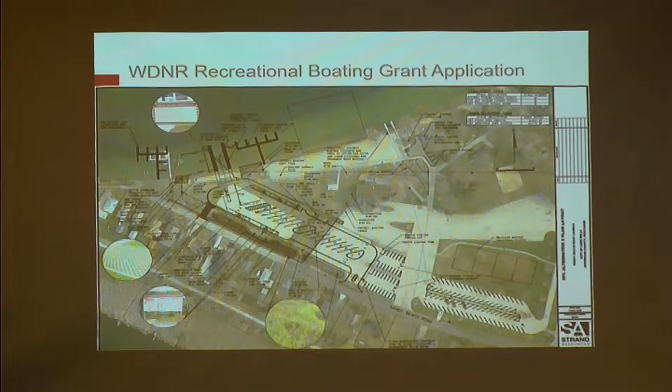But this has been witnessed in a number of different PIMs, so I wasn't going to spend too much time on it. We're going to talk bigger picture about the redevelopment study itself and the layout, and kind of why the council approved the study as it did. So just to orient some people, boy, it really is difficult to see, I don't know how to make it any bigger.

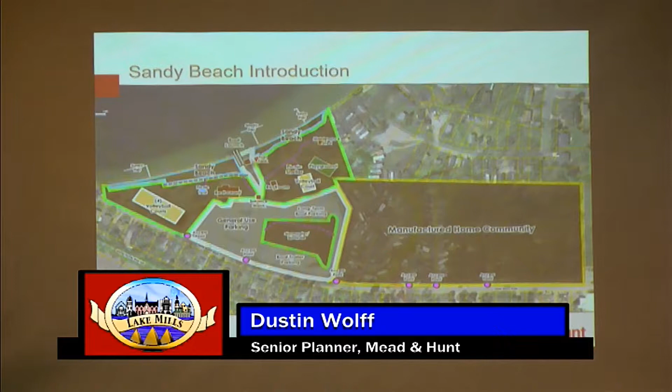On the east end of the study area is the manufactured home community, immediately west of Rotary Park. That transitions to the large area in the center, which is the general parking area with a stormwater management pond.

Well, it doesn't actually function as a stormwater management pond—it's really just a green area. Anybody who's been out there in the rain understands it doesn't really function as a stormwater management pond. That's another reason for doing the study.

In the center is the restaurant, and then the existing boat launch is here with the other facilities. So just a very quick orientation.

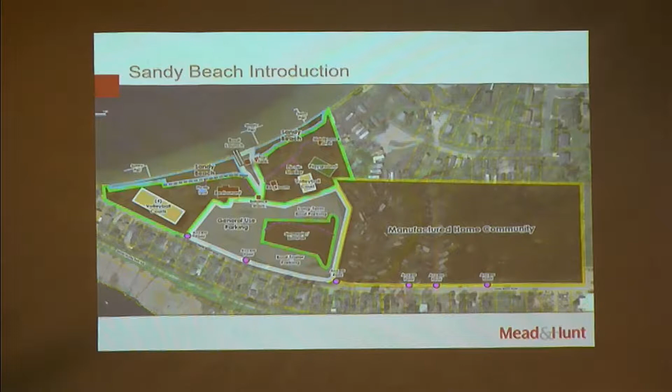The manufactured home community consists of not quite 100—Rob confirmed it's just under 100 operating sites out there, from May through October.

As I said, this started by looking at the mobile home community before we looked at the rest of the park site. The issue we're dealing with out there is all of the infrastructure is failing. We're highlighting some key issues here—there are 3/4-inch water mains serving the mobile home community, which is pretty substandard. There are collapsing sanitary sewers, failing asphalt.

The roadways out there are very narrow. When the city wanted to buy Sandy Beach Park, it had to take over the mobile home community as well, decades and decades ago. It wasn't constructed to any sort of contemporary standard, even for the time. It was seasonal housing.

The roadways are very narrow. They are not constructed to any subsurface standard that we would require, or any width that we would require today. So there isn't a lot of parking out there for the users themselves, so people park up and down the roadways. As I said, it's very narrow, so when there is an emergency issue, we do have problems with that.

There is poor site drainage on site. There's inadequate, really no, stormwater management for that area. And then there is a pump station that's very antiquated that needs to be replaced—a lift station, the sanitary sewer lift station.

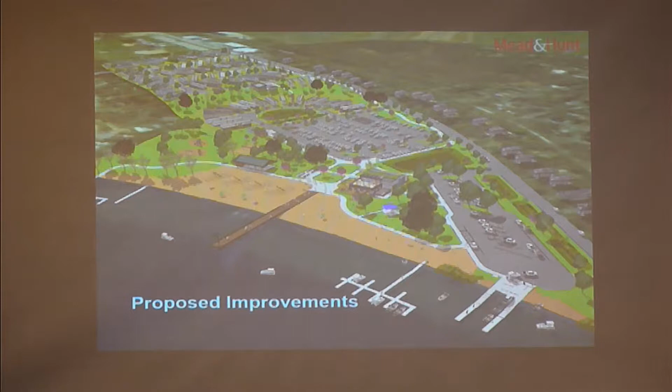At the end of the day, it's time to reinvest. So what we're showing here is a revised concept based on some of the feedback we received from the PIMs with the boat launches, and feedback from the council to remove certain elements, specifically the housing and lodging component. The focus here, and we'll have more detailed graphics, is to have a single unified beach for recreation activities, moving them to an area where they're highly visible when you're inside the park, not scattered throughout the site, to ensure many eyes on each other and to remove conflicts with vehicles.

The restaurant is still illustrated as the center, but we'll get into more of the details there. We have added on to the parking facilities considerably and improved stormwater management. And again, we have a number of graphics to illustrate that.

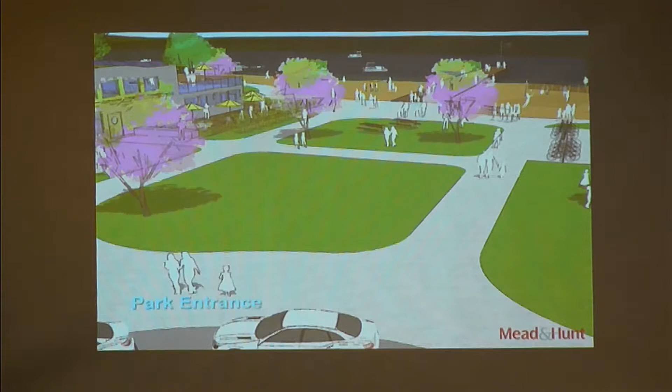In the short run, the launch would stay while the new one's being constructed, and there's discussion of maybe maintaining part of the launch - not for vehicle access, but for someone to carry or portage canoes or kayaks down to the water's edge. But as you can see here, we'd have a large green.

There would be a very large drop-off area at the edge of the parking lot, with no one going into the park with a vehicle. Very clear pedestrian spaces, extensive visibility to the water from the parking lot, and extensive visibility across this green to ensure it feels accessible and convenient for pickup and drop-off of passengers, while removing conflict points between modes where we can.

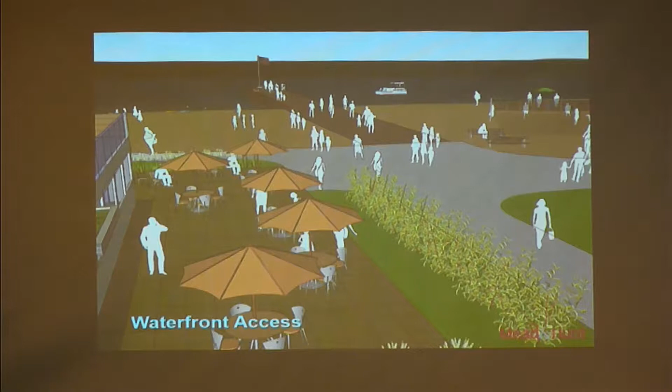It's just a different angle. This is showing a patio area with the associated restaurant, but again this element - there's a pier, we'll talk about that in more detail - is a unifying feature. You can see good visibility throughout the entry area of the park.

Extensive improvements to the parking facilities. The proposed parking facility is in the same location as the existing one. It's reconfigured a little bit to square it up, but it almost doubles the number of parking stalls.

One comment we heard from the Parks Board was to add maybe a few more islands, et cetera, to green up the parking lot a bit, which we don't disagree with. When we were tasked by the council, they wanted to see how many parking stalls can fit in an area that meets design standards and functions properly, and then we can tweak from there.

Part of the proposal is no parking on Sandy Beach Road. So if there's no parking on Sandy Beach Road, you need to make parking available for all those cars in the parking lot. So we go from about 127 parking stalls to what's being illustrated here: 280.

It would reduce from there if you added a few more landscape islands, et cetera, and those landscape islands could include infiltration, bioretention, and so on. We also illustrated, if there was a need outside the manufactured home community, additional on-street parking, whether angled or perpendicular. Whether that's put there at all is a conversation down the road, but it does fit and function properly - that doesn't mean it has to happen. In a nutshell, think of us doubling the amount of parking available off-street at the park site itself.

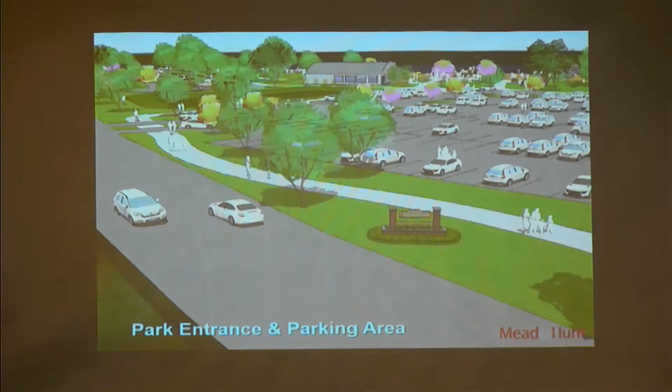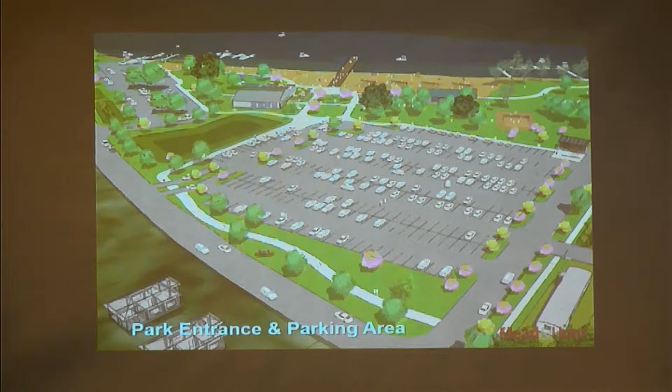Again, improved parking facilities, better pedestrian facilities to get into the site and within the site, to separate pedestrians from vehicles. You can see ample parking, a drop-off area, easy to identify entries and exits, and good, safe circulation within the site. There would be a series of pay kiosks around the park area, convenient whether you're going to or coming from your car. The rate structure hasn't been sorted out, but the plan is that you'll pay when you park your vehicle, with the rest of the facilities at the park free to everyone.

There's an addition of a small maintenance facility for park staff, for mowers, etc., off to the side. That white cube structure in front is the lift station that would have to be replaced. It's located off the edge, easy to access for maintenance, but not in the middle of the site where it currently is.

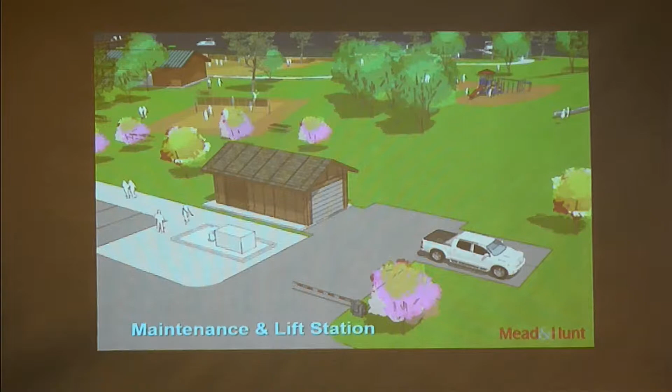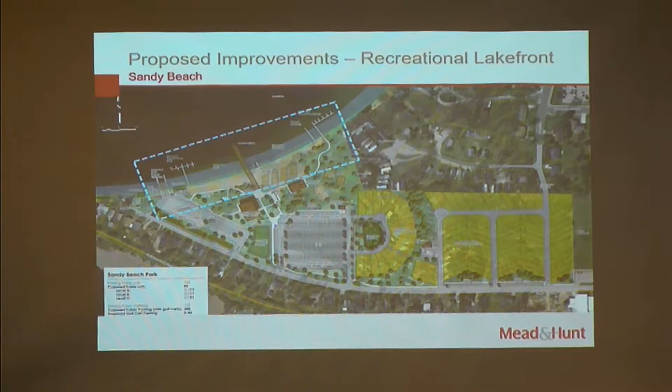The most notable element, and you can see how the discussion stemmed from the boat launch itself, is the new unified lakefront—a singular beachfront from one end to the other without fear of vehicles in the middle of it. There's a pier structure there, a big architectural element extending out into the water so people can enjoy that.

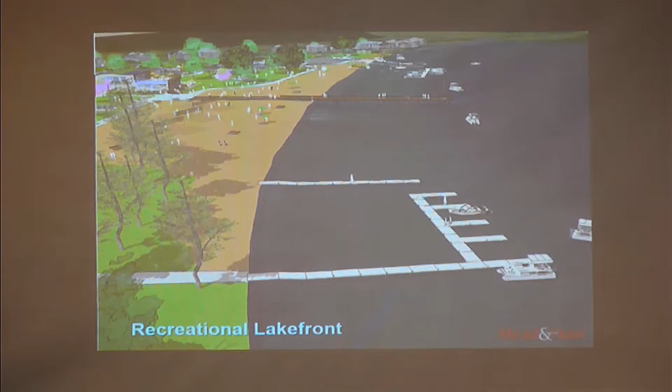The boat slips you see are the existing boat slips. They would be ADA accessible with a path system, so not exactly like they are now. We're trying to make the entire park more accessible to all users. The final configuration and location of the boat slips would be subject to review by park staff and the park board itself.

Some more conversation would likely happen with that. We've gotten some feedback—people want to make sure there's an area to beach your boat if slips are full, and that slips are located so they don't conflict with swimmers. We're not showing all the details, like a defined swimming area, here, but those things would be brought forward again, as you have today. There would be a large identified path system where someone can readily get to the water's edge.

That pier we're showing in the middle references history—Sandy Beach has always had a large element like this; this was a huge water slide. Some attendees at previous presentations remembered going down this slide. I'm amazed just looking at the photos. I'd be remiss to think a parent today would let their child go down this, but it looks amazing and a little fearful simultaneously. It was a huge structure people came from miles around to participate in at the beach.

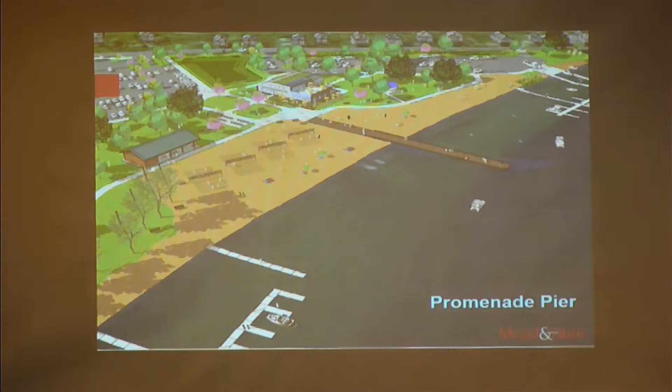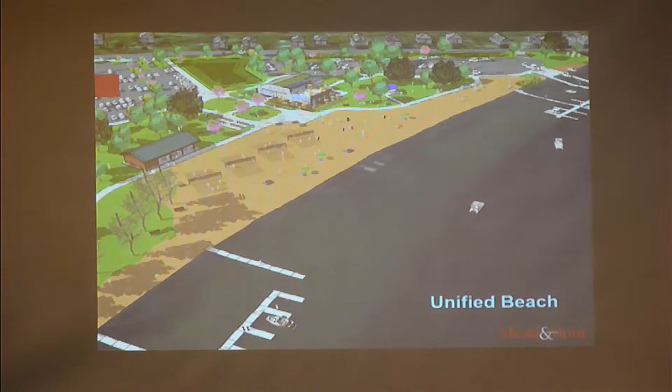That's where the pier you see projecting into the water comes from—having a large element that attracts people out onto and over the water. There's certainly the ability to remove it; it's not a linchpin to this design, but it was an attempt to pay homage to the history of Sandy Beach Park. There's great information in a case near the entry downstairs from the Historical Society about the beach itself—I encourage you to go read it and see some of the photos.

But again, a large unified beachfront separates vehicles, especially boats, from the boating and beach recreational areas. There are also improved volleyball courts and a playground area, moving them from where they are now off on the edge.

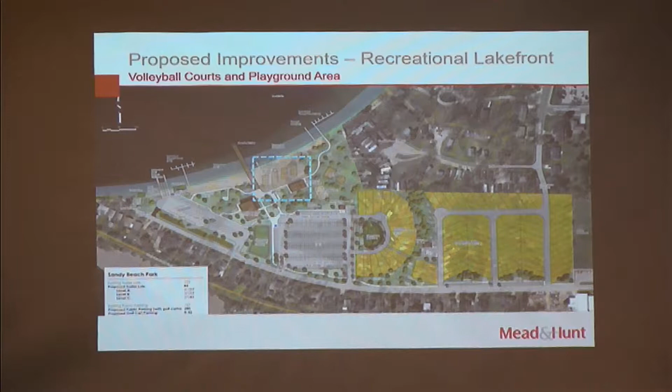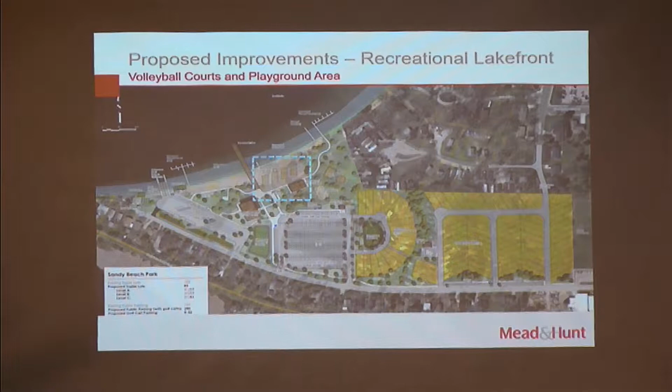They're going to get disrupted by the proposed improvements for the boat launch. There is an interim plan to locate them inside of the existing green area in the parking lot, and the volleyball organizations have been contacted about that, and they're fine with that in the interim.

But putting beach volleyball on the beach, you have, with the redesign, plenty of area out there to accommodate the beach volleyball courts on the beach and still have plenty of beach space for sunbathers and families. It does retain one of the volleyball courts out in the kind of park setting area as well.

They do use them all pretty regularly, so we want to make sure that we are accommodating them moving forward. But again, you can see pulling all the recreational activities together so people aren't off on, if your kids are playing volleyball, they're not off on one side of the park and you're over on the other.

Improved playground. Some of the playground equipment is nearing the end of its life, and so does need to be replaced. Playground equipment, while we're showing examples here, would range for small children to tots to kind of active preteen children.

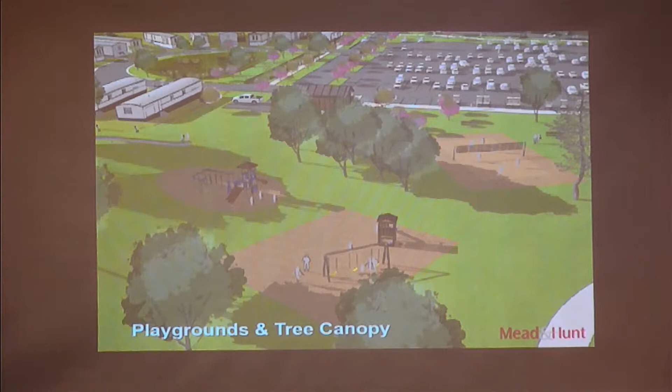The equipment, et cetera, would always be, as you normally do, evaluated by your park staff and determined by the Parks Board as to what's appropriate out there.

New shelter with bathroom facilities out there, so an open-air shelter with connected bathrooms. The bathroom facilities out there are antiquated. They need to be replaced. A new structure out there is necessary as well, so you can still have some shaded, covered parking, picnicking area.

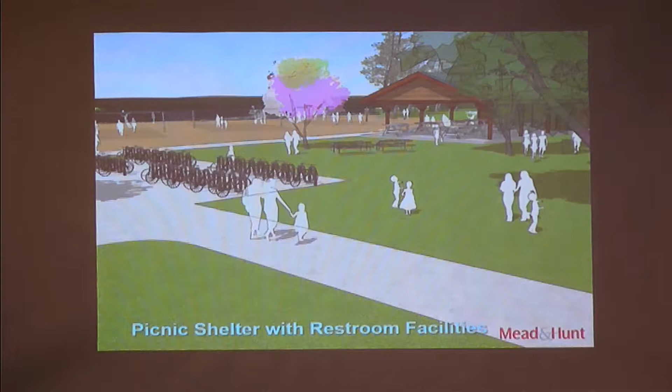Certainly could be made available for rent as you do with some of your other park facilities. You can see there's some lawn area where you can just have some open-air picnicking as well. And the same holds true on the other side of the park, where you have the existing ADA area for picnicking, and again, some other open-air picnicking areas.

The boat launch, this does reflect 2A. This was revised over the last few weeks, month and a half, with the input received at the PIMs and some of the other presentations that were made. This is a 2-launch facility. There is parking for 17 boats and cars and trailers out there, including an ADA one on the end.

On each side accommodates treatment stations, wash stations for aquatic invasive species. So before you put your boat in and when you take the boat out, Patricia Cicero has been involved in determining that.

Stormwater facilities here, linear bioretention facilities, before release, there is a pipe that eventually goes back out into the lake like it is now, but again, treats stormwater before it goes back into the lake, which is not necessarily the case today. We have separated out the entry exit for the boat launch from all of the other parking, so

there will not be confusion between the two. They have their own entry here. What you're seeing here, which looks like a driveway, would really be an emergency access only.

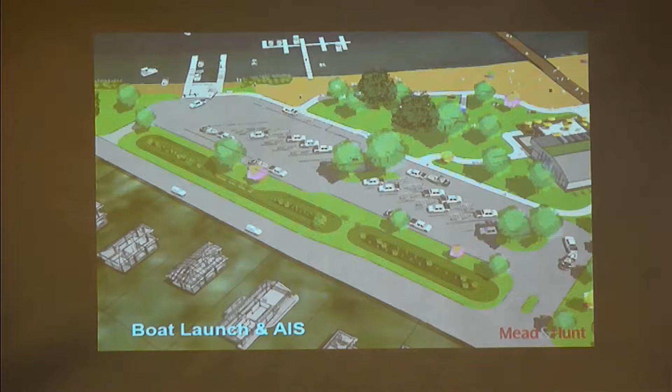Generally think of a hard surface, grass covered, like grasscrete product. So emergency services, et cetera, could utilize it if necessary, but by and large, it would be cordoned off and look like grass because it's got a grass growing through the product itself.

Just another angle of it, we were showing an area where people could beach themselves. We're also showing plantings that were the request of Patricia Cicero at the edges of the water, both to define space and to be functional for treatment on the water's edge.

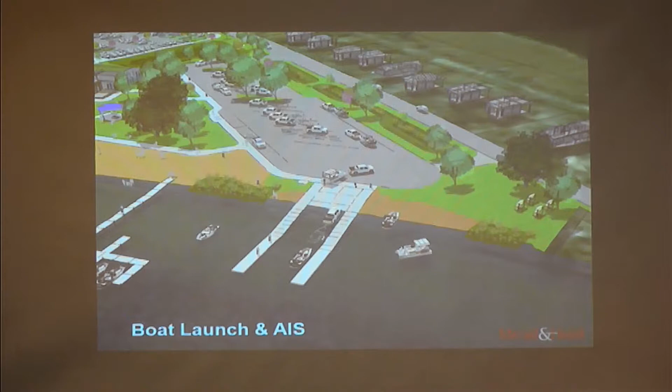As I said, the issue with the piers and locations here, some of that may need to be tweaked as we get into the details. We're not quite there yet on that. A little more feedback may be necessary for the Parks Board to evaluate. So what's appropriate, we did hear some feedback on what's desired, what's not desired.

Again, showing that all of the facilities that are out there now in the water can be retained, in essence.

Showing you, this is the view now through that area with some of the private property, and then to the right is the security fencing, because it's, again, directing you to pay to use the facilities.

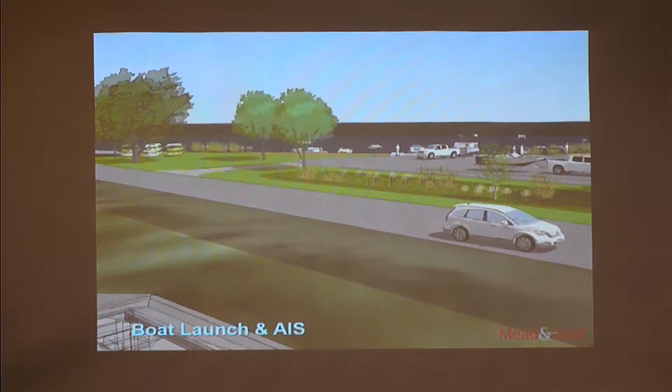This would be a rendering of what they would see. Yes, they'd be looking across the boat launch, but it would be no fencing. It would be native species plantings there. And when a boat's launching, yes, that would be in the way of the view of the water, but over time, it would be different than this.

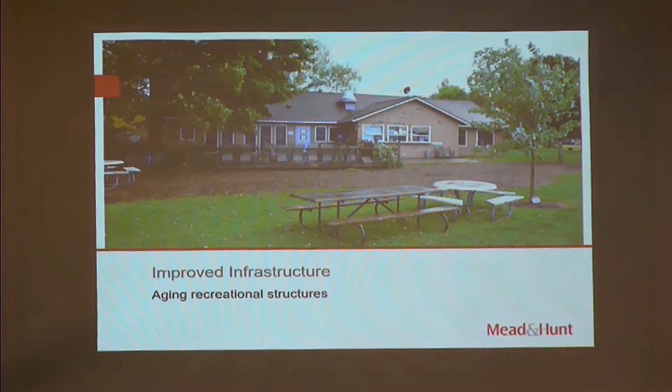Need to improve the restaurant facility, and it's something you certainly need to weigh in on and determine if you're supportive of. The existing facility is at the end of its life. It doesn't function properly, it has failed in certain areas, and was improved by the city to make it functional. Of course, it's well utilized in the summer months. A new facility out there could be used year-round, which would be a nice option, especially if you program things in the winter months like ice fishing. You certainly get a lot of pond hockey on the green area and parking lot, so a warming shelter and restroom facility would be nice to have out there.

I don't want people to get bogged down on the architecture that we're showing here. This is just one version. It shows a restaurant with event space facility and an open-air raised deck. This is a 2 to 2.5 story facility out there.

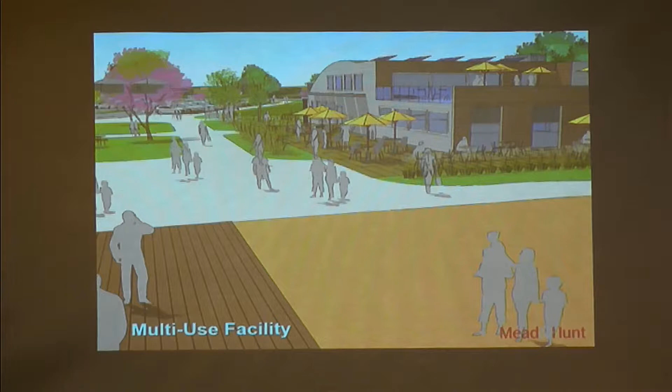As we get closer to potentially having an end user, as with anything in the built world, it would come to the Plan Commission for review and approval prior to any construction. So again, this is a little artistic rendering of what could happen out there, trying to show low, flat lines to not overwhelm the space, but a nice unifying feature in the center for food and beverage activities, with a lot of outdoor seating.

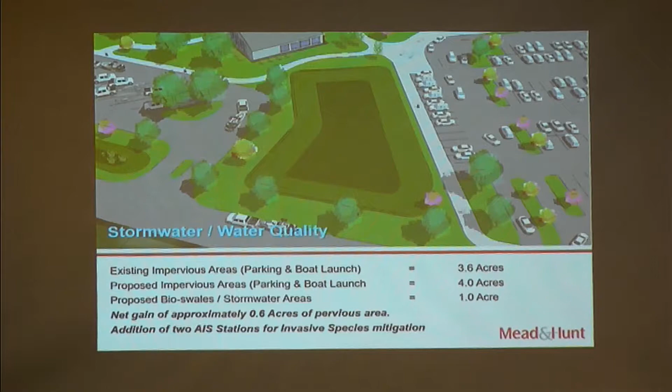A lot of stormwater management is being installed, between the proposed parking area and the boat launch, and another one between the manufactured home community and the parking lot. This would be a lower, dry green area. When it rains it would function, but more often than not it would be a dry area you could go throw a frisbee in. In the winter months it would be flooded and used for pond hockey, which is pretty well used to date.

Overall, hard surface areas for driving and/or parking and the boat launch is an increase of about a half acre of impervious area, but we can offset that with bioswales and added green space inside the parking lot. Those are details that generally get sorted out as you get closer to construction. We aren't at engineering level here. We worked from survey level data to put these graphics together for the council, so it does have a foot in reality. We know it all works, but as with anything, as you saw with the boat launch itself, as you get into the engineering, some things slide around here and there to make sure it functions properly. Those are next step items.

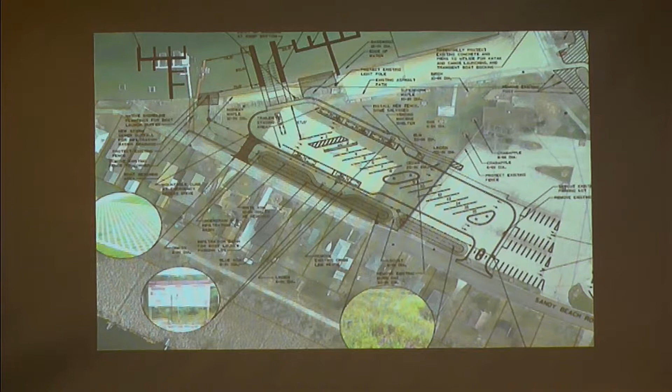So as you see here, this is the schematic for the proposed boat launch. This is the one that has also been approved by the Parks Board for the grant. There is an interim step, and we aren't redoing the entire parking lot when we do this, so we're separating out the activities for boat launching, restriping some of the pavement in the existing parking lot to make sure it functions until you move into rebuilding the entire parking lot.

This is showing that grasscrete product. Grass grows up through it, for emergency access purposes.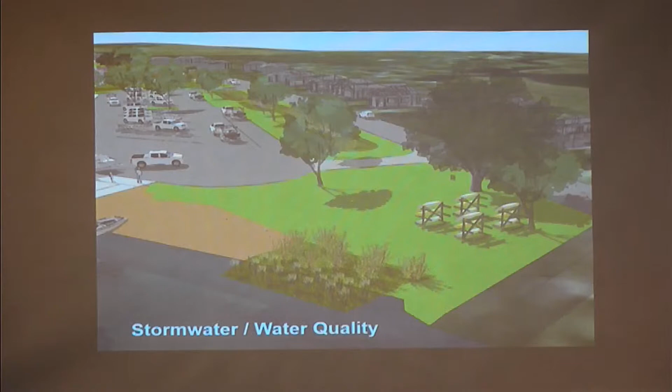Just showing various views of the site, the grasses that have been asked for by Patricia Cicero to be added into the area around the boat launch itself.

And then the manufactured home community - we have reconfigured it so it meets contemporary design standards for the lots and future homes. There's a reduction to about 85 manufactured home sites, improved access to all the public infrastructure, an on-site management office with shower and laundry facilities that would function as a shelter in inclement weather, and an extension of Ferry Drive. So this is what's out there now.

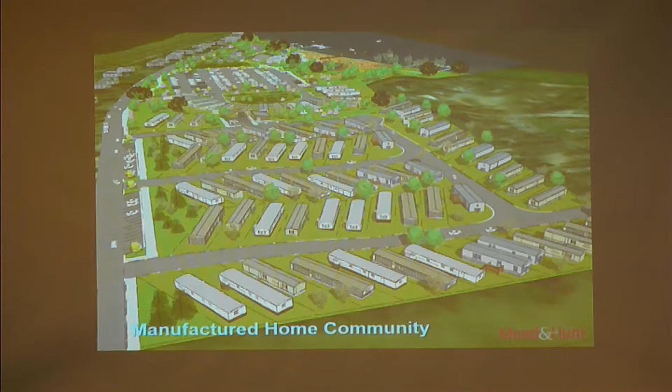The infrastructure is failing, it's pretty tight as we talked about. The layout is generally the same, but the sites are a little bit larger, accommodating not only the home but 2 off-street parking stalls per site. That's a significant improvement, because currently some may only have room for one vehicle near their home, with others parking along the existing roadway, which is very narrow and isn't constructed to handle that type of parking on the edges, so it starts to deteriorate.

This is being redesigned to accommodate parking on individual sites, not on the access drive, even though the access drive will be widened to better afford navigation of vehicles, but also emergency services should that be necessary.

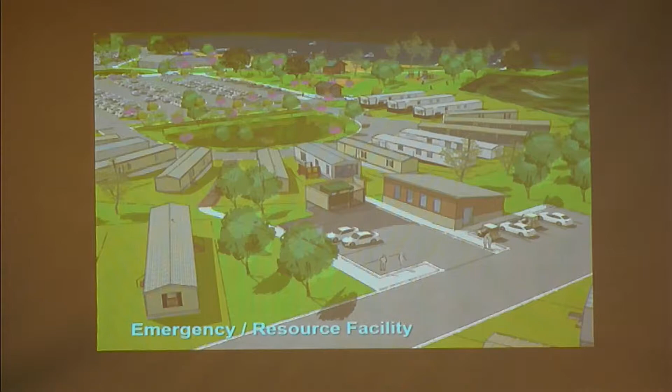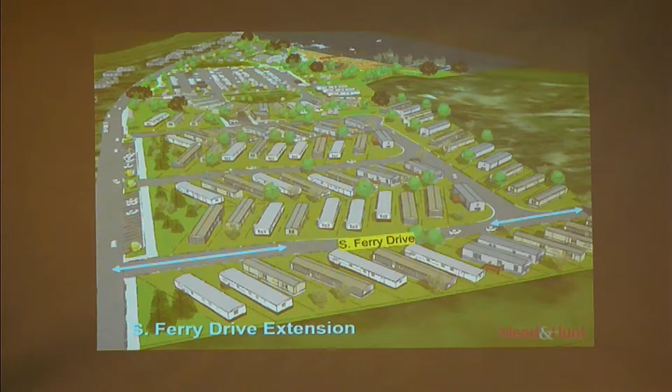This is the existing resource facility out there, showing a new one centrally located between the upper and lower manufactured home communities, with easy pedestrian connections over to the park itself, and the extension of Ferry Drive from Sandy Beach through.

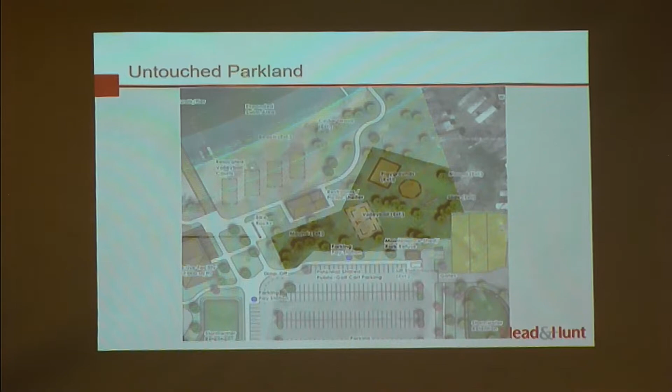The design here works around the mounds identified out there as an archaeological resource. One of the first steps in the study was to reach out to the state to find out what's out there. They provided some documentation, but there are areas we just aren't touching, which is the existing mound area. We show improved facilities around it, but staying away from it.

Encountering archaeological resources is nothing new in construction projects for Lake Mills. When a project is let, there's an archaeologist on site during construction to ensure people stay away from it. Should something be encountered, you had that with Main Street, with Pine, with the LSL project—every water service lateral we do requires an archaeological report. We did it with the cemetery and with all the electric lines we put in. So we have an extensive background with an archaeological firm out of Milwaukee, and they're used to it. Lake Mills has been identified as an area with a lot of activity, so we anticipate everything we do will require an archaeological review.

We did break the project study down into sections, just to make it easier to identify study costs associated with it, et cetera. This also led to the implementation strategy, so there's phasing documentation in the study. But at the end of the day, the first thing that has to occur is the boat launch—it needs to be removed from its current location before you can move forward with anything else.

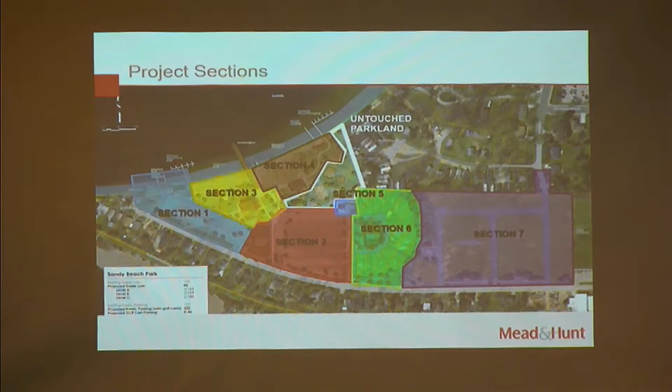So you don't have to immediately start touching the beachfront and the building. You still have a little bit of life left in the building, but when I say a little bit, I mean a few years—that's that area here, which would be the third piece. The goal is to get the boat launch in, then move into replacing all the utilities, upgrading the manufactured home community, and getting the parking sorted out, opening up the entire park as a free resource to all users.

So I went through things, I don't want to say quickly, but purposefully. I'm sure there are questions from the commissioners on this—plan commissioners and staff, we have people here who have an interest in the outcome of this whole redesign, and I would like to entertain a motion. Is there anyone that would like to say something this evening?

Okay, we do have one person. I would entertain a motion to suspend the rules for 5 minutes. We can always add to that to hear anyone who wishes to speak to this, since people have appeared and have an interest. Is there such a motion? So moved. Second. Moved and seconded. All those in favor signify by saying aye. Aye. Anyone opposed? If anyone wishes to speak, please approach the podium, sign in, and announce your name for the clerk.